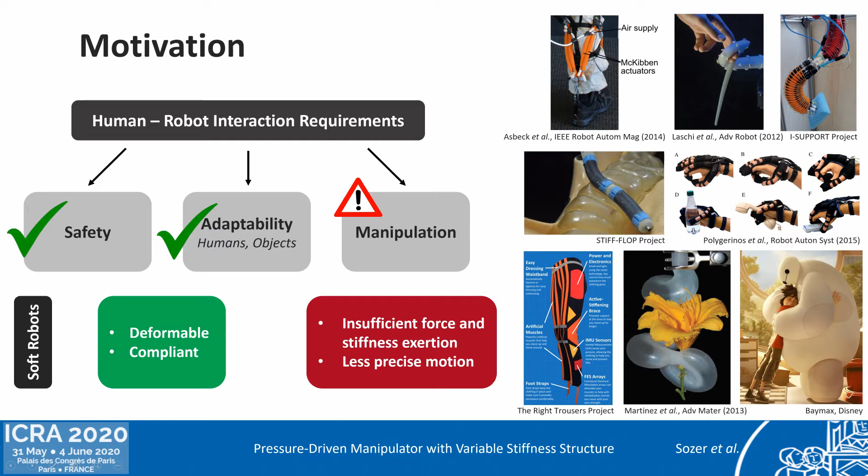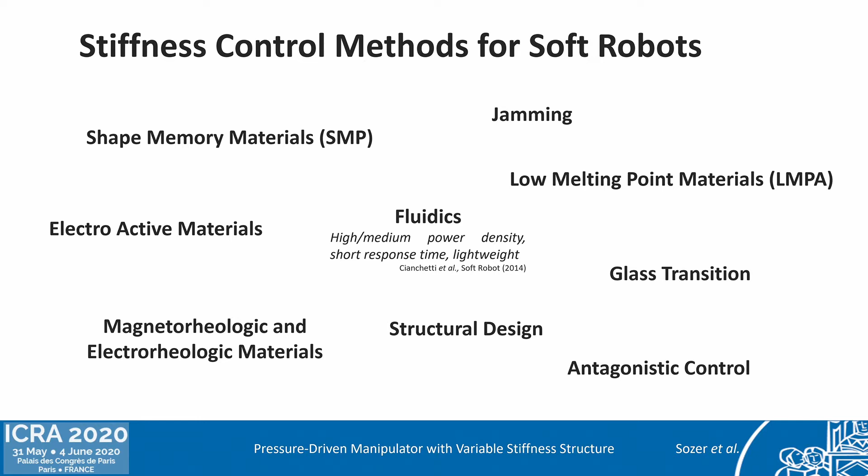To address stiffness control of soft robots, various techniques have been applied, from shape memory materials to fluidic-based solutions, like in our study. These methods can be used to control the stiffness of the whole body or just a part of the body based on joints. Joint-based structures can be used to provide partial stiffness or bending shape control through proper stiffening actuation sequences.

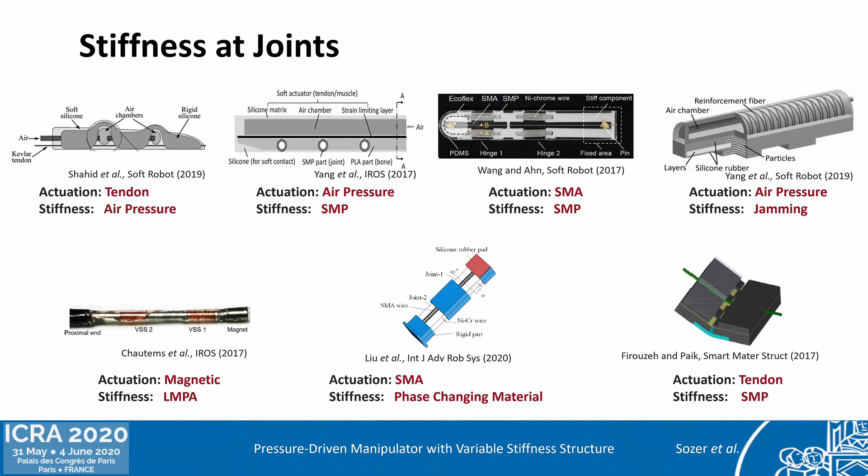Among recent joint-based solutions, actuation and stiffness control have been obtained from different phenomena. For example, pressure-controlled stiffness of a tendon-driven manipulator. We aim to reduce the control complexity and proposed a manipulator with independent pressure-controlled actuation and pressure-controlled stiffness.

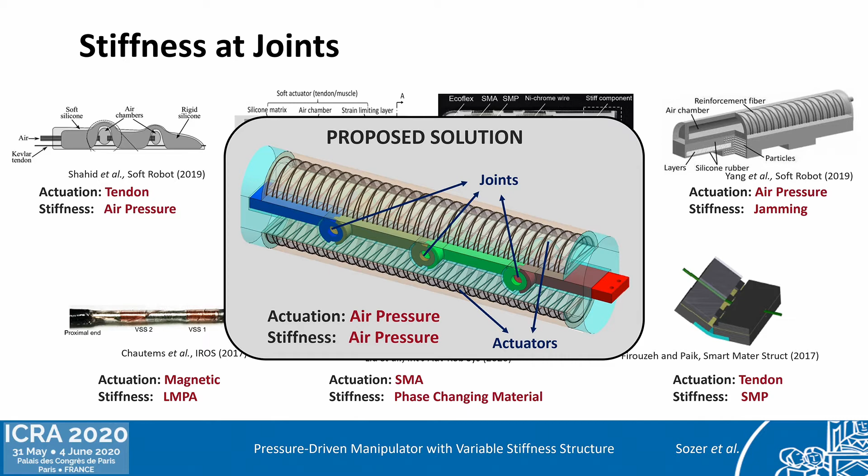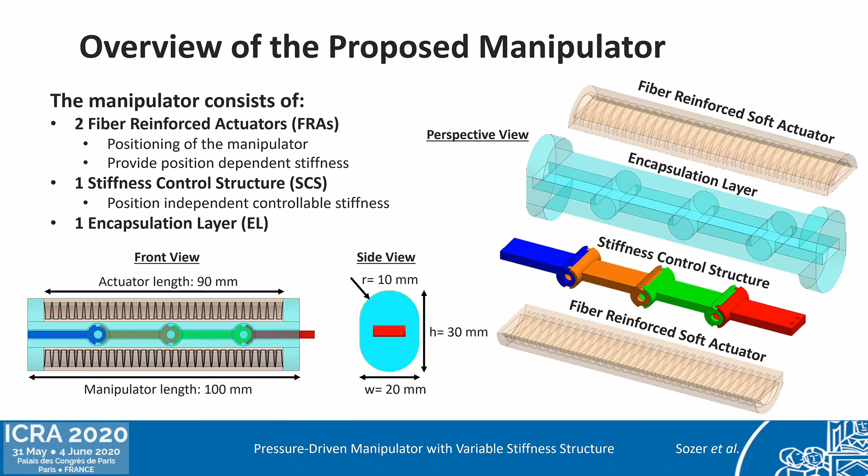The proposed manipulator consists of two fiber-reinforced actuators, one stiffness control structure, and one encapsulation layer. We demonstrated independent stiffness and positioning capability of a 100 mm long manipulator. Our manipulator includes two symmetrically placed identical soft actuators for bidirectional planar positioning.

Each silicone rubber-based actuator was designed in semicircular geometry to reduce the bending resistance and reinforced with inextensible fiber to support elongation while limiting radial expansion. Upon pressurization up to 1.5 bar, each actuator deforms and generates pressure-dependent stiffness.

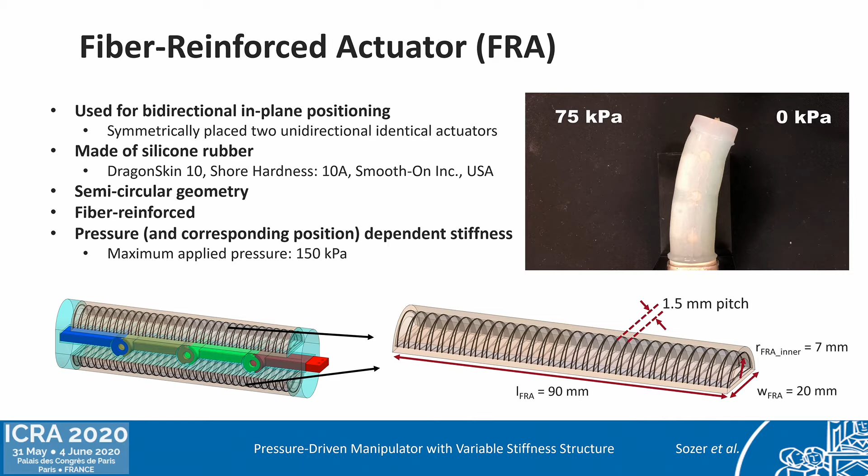The second component is the encapsulation layer. As its name suggests, it encapsulates the stiffness control structure and caps the two ends of the actuators. It is made of stiffer silicone rubber, so it also acts as a strain-limiting layer.

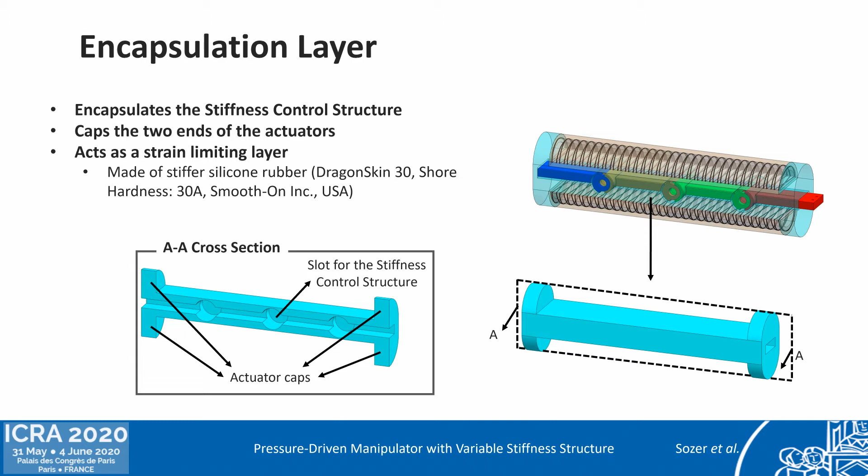The last component is the stiffness control structure. Unlike the position-dependent stiffness of actuators, this structure can control the manipulator stiffness without position dependency. In our specific design, the structure consists of three independent revolute joints and embedded pressure chambers, one for each.

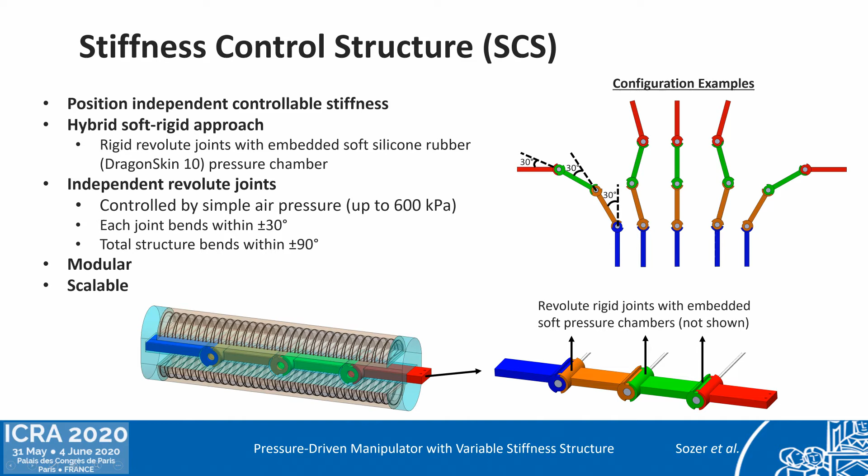Each joint can be pressurized up to 6 bar and positioned within 30 degrees bidirectionally. Together with the modular and scalable design, the rotation angle and length of the structure can be modified for further needs. Each joint consists of two rigid links, a pressure chamber, and alignment pins.

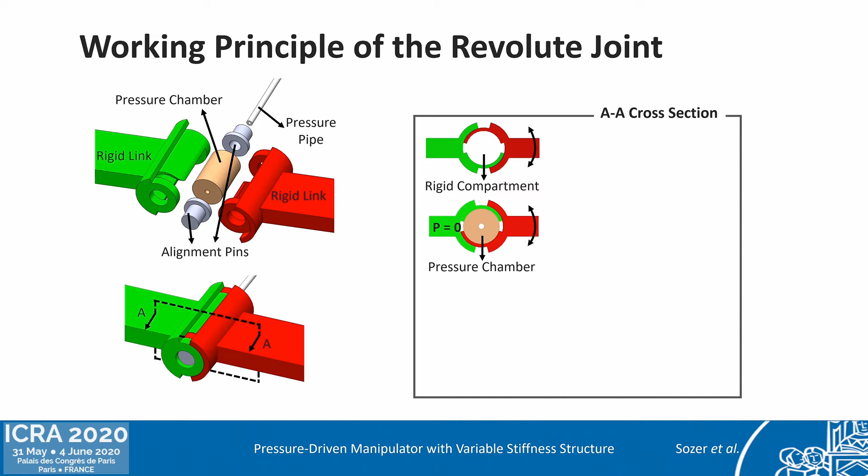By the integration of two rigid links, a rigid compartment in revolute joint form appears, and the pressure chamber is positioned in it. Upon pressurization, the chamber expands and fills the gaps left in the rigid compartment. That increases the stress and resultant friction at the contact surface between the soft pressure chamber and rigid compartment walls, so that it becomes possible to increase the joint stiffness through input pressure.

When the pressure is removed, the stress and resultant friction decrease, and the joint returns to its less stiff state. So we can say that the stiffness of the joints can be controlled reversibly. Moreover, due to the pressure-based stiffening mechanism, transition time between low and high stiffness states is less than 1 second.

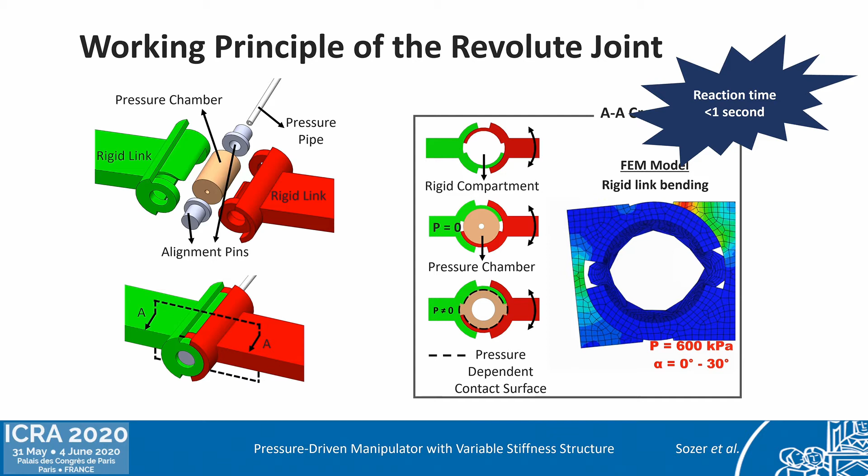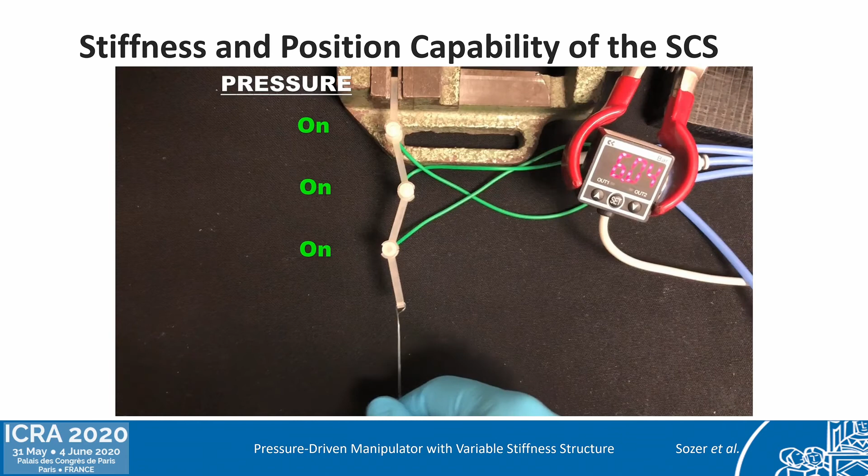Without pressure, our stiffness control structure is compliant and freely bends. Thanks to independently controlled joints, it's possible to obtain partial or total stiffness by pressurizing the desired number of joints in various combinations. In addition, having independently controlled joints allows us to maintain various configurations. It can be straight or non-straight, like a zigzag.

In this demonstration, we pressurize the joints at 6 bar. Following the depressurization, the structure returns to its compliant state.

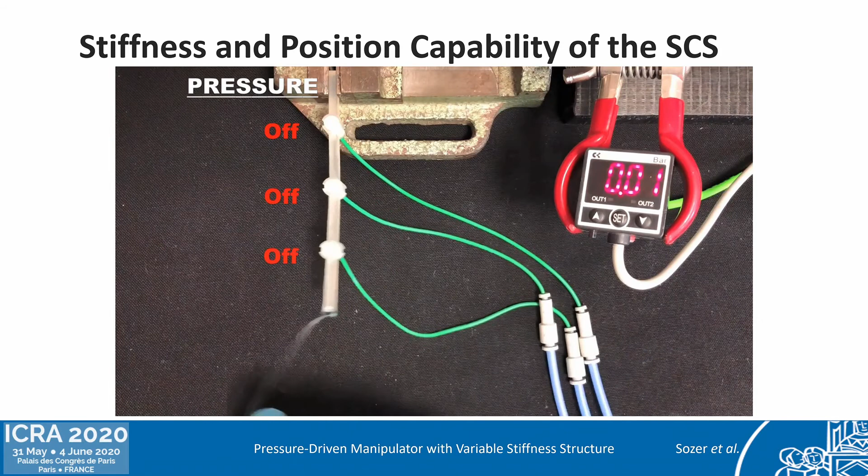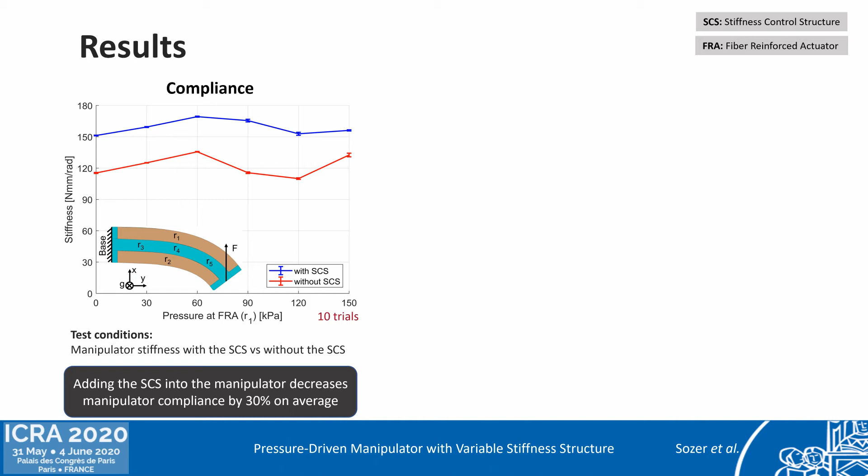At that point, the first question may be how much the stiffness control structure affects the compliance of the manipulator. We measured the stiffness of the manipulator with the stiffness control structure and compared it to the manipulator without the structure. We repeated this comparison for different actuator pressures up to 1.5 bar. We measured that adding the stiffness control structure reduces compliance of the manipulator by 30% on average.

The second question is how much the stiffness control structure affects the end effector path and bending angle of the manipulator. We pressurized one actuator up to 1.5 bar and then depressurized it. We repeated this sequence 10 times and tracked the end effector path using a magnetic tracking system.

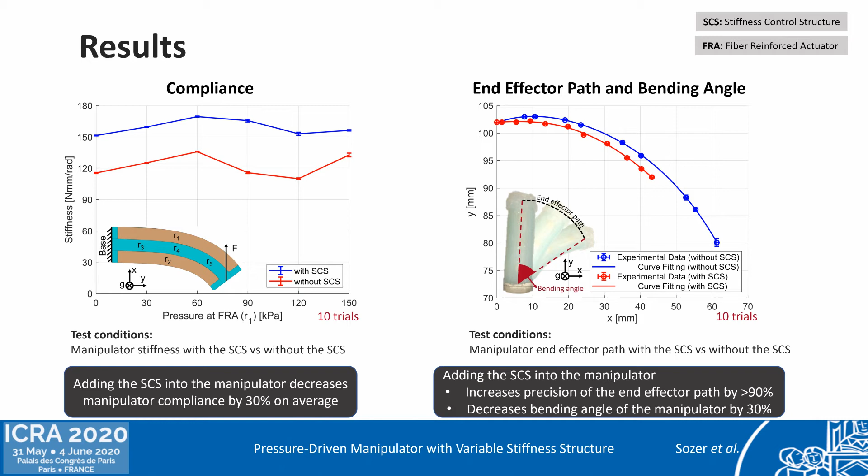And we calculated that adding the stiffness control structure into the manipulator increases the precision of the path followed by the end effector by more than 90% on average. On the other hand, adding this structure reduces the bending angle of the manipulator by 30%.

The third question could be how the number of joints affects the obtained maximum stiffness. We tested structures with 1, 2, and 3 joints. After pressurization of the joints up to 6 bar, we measured the stiffness of each configuration. In our specific design, which includes 3 joints, the stiffness of the overall structure increases 5-fold at maximum input pressure.

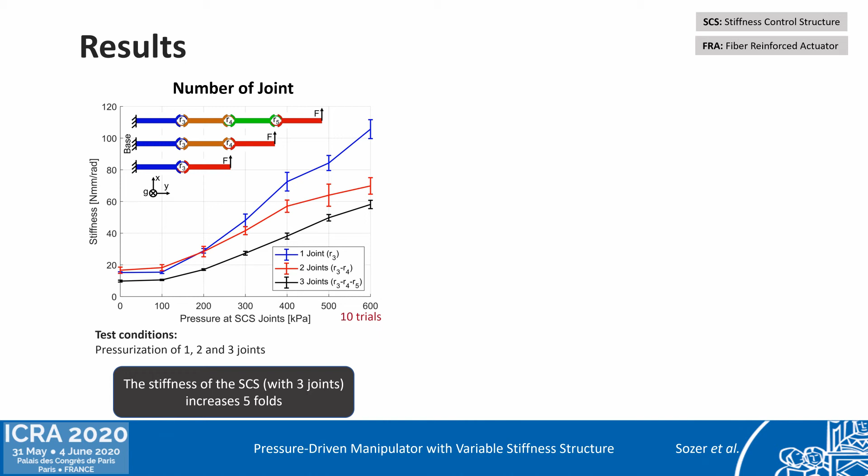The final question is how much the stiffness control structure contributes to the overall stiffness at different manipulator positions. We tested 3 manipulator positions by pressurizing one actuator. First, no pressure, which is the straight manipulator position. Second, 0.75 bar, and last, 1.5 bar.

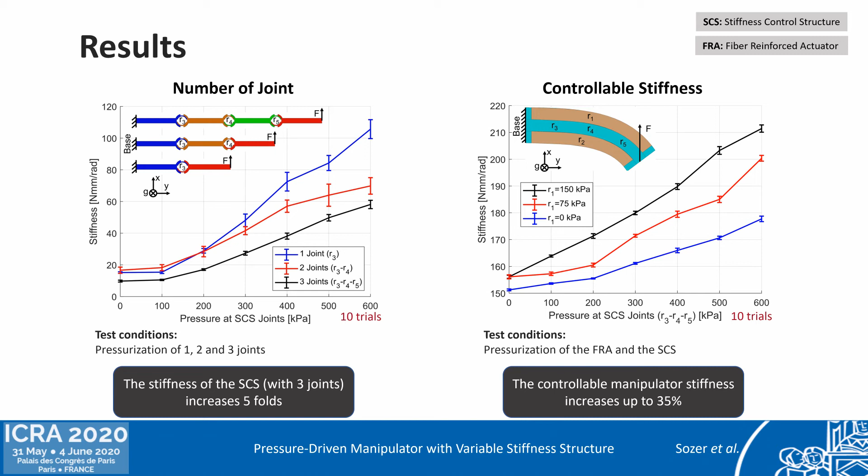At each position, we pressurized the joints up to 6 bar at the same time to obtain maximum stiffness contribution. Then we measured that the structure increases the manipulator stiffness up to 35%.

In conclusion, we demonstrated a manipulator which has independent actuation and controllable stiffness with simple air pressure, while 2 fiber-reinforced actuators control the position of the manipulator in plane. The stiffness control structure adjusts the stiffness of the manipulator without position dependency.

The stiffness control structure has 3 individually controlled joints which allow us to obtain partial stiffness. Thanks to the modular and scalable design, the number of joints can be increased or decreased. It's possible to use the proposed concept when a manipulator with a different scale or bending amount is needed.

With the current configuration, we achieved up to 35% controllable stiffness increment. The proposed concept can be used in various applications which need improved safety but also controllable stiffness. In future works, we intend to miniaturize the manipulator. We aim to keep the diameter less than 15 mm to be used for surgical applications.

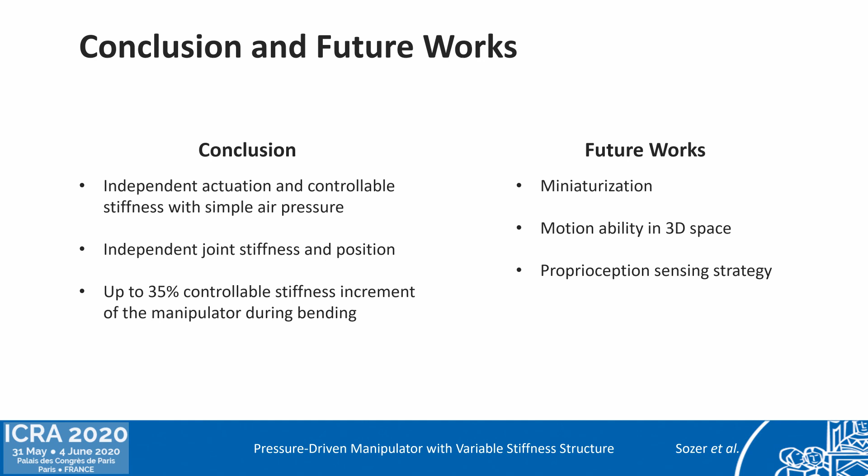In addition to the demonstrated in-plane bending, we want to develop a manipulator by adding the third dimension using spherical joints while maintaining the position-independent stiffening concept. And also, we want to add deformable and stretchable sensors into the actuators for position feedback. It will allow fixing the manipulator position against disturbances in an unknown environment. This concludes my presentation.